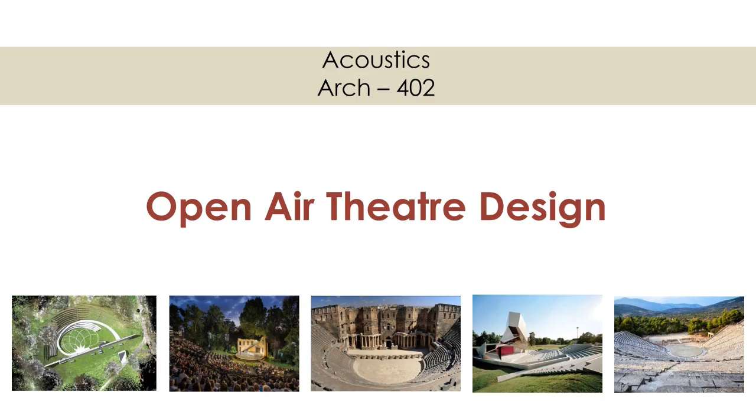Introduction. The purpose of theater is to provide recreation to people. The theater is a branch of the performing arts and it is concerned with acting out stories in front of the audience. Open-air theater is a space in which a performance may be given before an audience, and as the name suggests, it does not have any roof structure. The word is from the Greek theatron, a place of seeing.

A theater usually has a stage area where the performance itself takes place. Since ancient times, the evolving design of theaters has been determined largely by the spectator's physical requirements for seeing and hearing the performers and by the changing nature of the activity presented.

Here we have a few examples of open-air theaters from around the globe. The first one is Teatro Antico di Taormina, Taormina, Sicily, Italy. Second is Vondelpark Open Air Theatre, Amsterdam, Netherlands. Third is Regent's Park Open Air Theatre, London, England. Fourth is Greek Theatre of Syracuse, Sicily, Italy. Fifth is Toga Open Air Theatre, Toga Art Park, Toyama Prefecture, Japan. The last one is Minack Theatre, Cornwall, UK.

In order to design an open-air theatre, one must recognize how sound is affected by meteorological conditions and topography. When we talk about meteorological conditions, we are trying to see how the atmospheric conditions, like temperature, wind flow, and humidity, etc., affect sound. In spaces which are not covered, or do not come under room acoustics, we have to take care of the noise which is created at some point and is carried to another point or location where good acoustical quality is required, like an open-air theater.

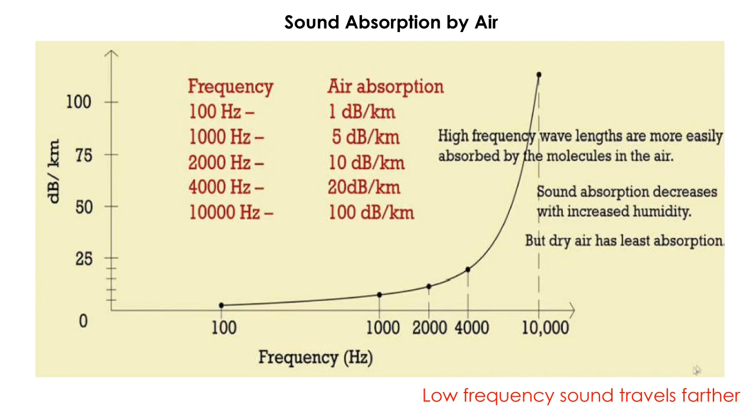So, at T equals 20 degrees Celsius, the velocity of sound is 343 meters per second. And for every 1 degree Celsius change of temperature, the change in speed is 0.6 meters per second. 0.6 meters per second per degree centigrade change of temperature is a big amount when we talk in terms of the wavelength of sound. In feet, this comes to around 2 feet per second.

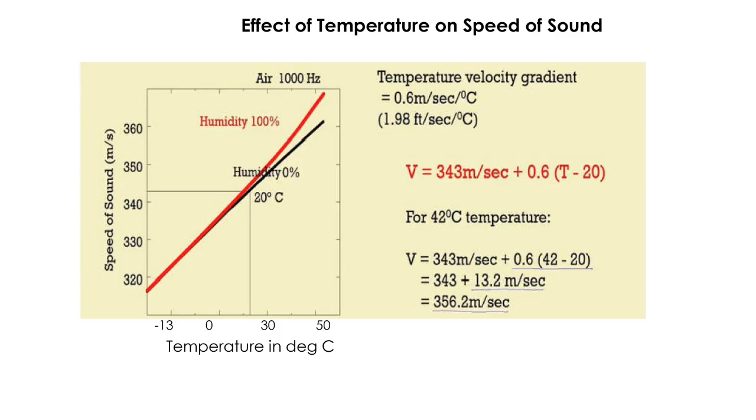When it is daytime, the ground is warm, and the atmosphere above it is cool. The sound speed at a position much above the ground will be lower, whereas the sound speed below near the ground will be higher. At the lower portion near the ground, the sound will be moving faster as compared to the upper part.

If the direction is this rightward, there will be a change or the sound wave will move upward. This will lead to a no-sound zone in this particular area rightwards of the source. If a receiver is standing here, he will not get any sound. This area becomes a sound shadow area.

Thus, even if the source is close, the people around may not be receiving the sound, whereas the sound energy is drifting upward. This is called temperature lapse or superadiabatic. So, temperature gradient leads to the bending up and down of sound waves, and during the daytime, the ground being warmer, the sound moves upwards, creating sound shadow zones in regions close to the ground.

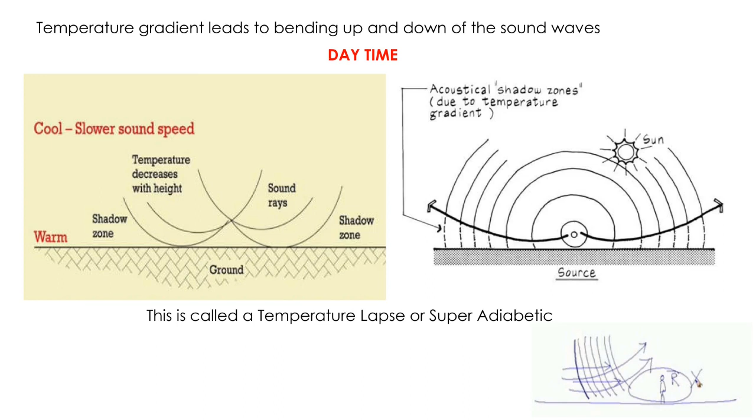The opposite phenomenon or an inversion happens during nighttime. During nighttime, the ground surface is cooler, whereas the atmosphere above is warmer, where the sound tries to move faster, leading to an inversion. You can see, here the sound is bending downwards or more towards the ground. And this is called temperature inversion.

This happens mostly during the nighttime when the temperature is the coolest right next to the ground and warmer as you increase in height above. This downward refraction of sound helps people hear conversations even across water bodies or across long distances, particularly at nighttime. Hence, distant sounds are usually heard at nighttimes rather than daytimes, particularly because of this temperature inversion.

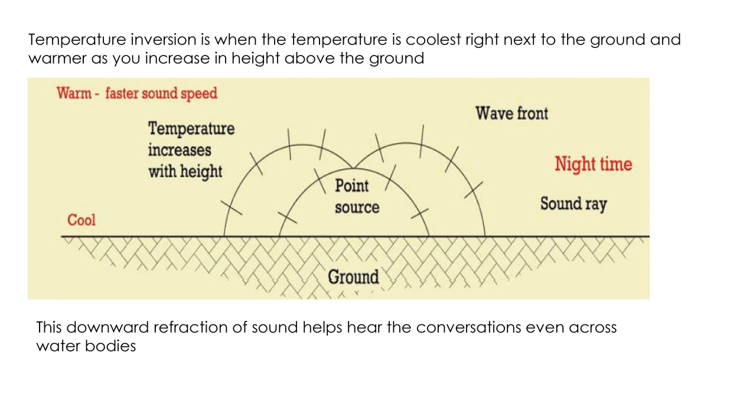This is what you see as a summary, that hot air moves faster, and when it is nighttime, it bends towards the ground, or towards the receiver from the source. And during the daytime, the hot air drifts the sound upward, which leaves the receiver with very less sound.

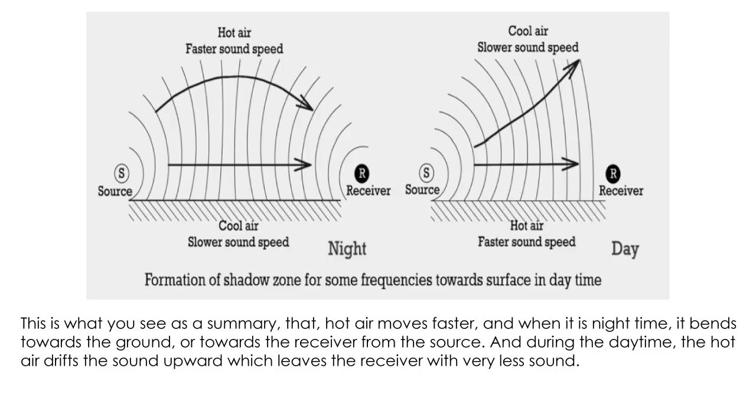Influence of wind speed on sound. The effect of wind on sound outdoors is a complex phenomenon. Downwind from the source, sound is normally bent toward the ground, increasing its sound level. Upwind, sound is bent upward, causing a shadow zone where the sound level will be reduced.

For example, at distances greater than 500 feet, as shown below, the upwind mid-frequency attenuation can be about 10 decibels for winds of 10 miles per hour. However, a reversal of wind direction can increase the sound level by about 10 decibels at the same location. Consequently, do not rely on attenuation from the wind when designing outdoor noise control measures.

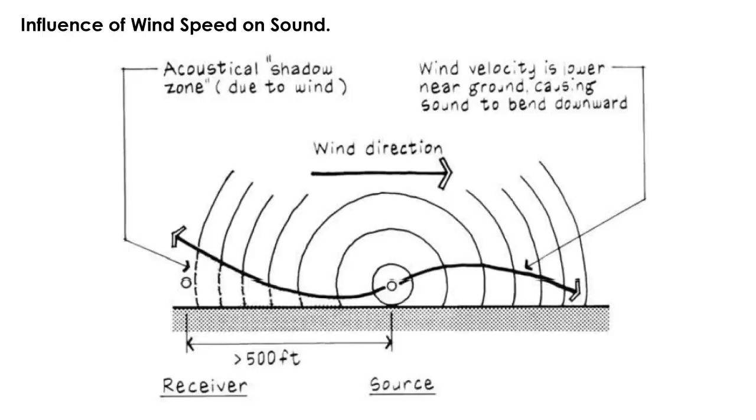When the wind is flowing, it is found that the wind speed varies logarithmically up to a certain height, say around 30 to 100 meters, depending on the speed of the wind. At the initial stage, it moves very rapidly. It is flowing, and after a certain height, it becomes steady.

It is drifted upwards by the wind when the sound wave is traveling in a direction opposite to that of the wind flow. Since the source is producing sound in all directions, a portion of the sound which is in the opposite direction to that of the wind gets drifted up. And on drifting up, some low sound pressure zones are automatically created in the opposite direction, and the sound bends down to fill up those spaces.

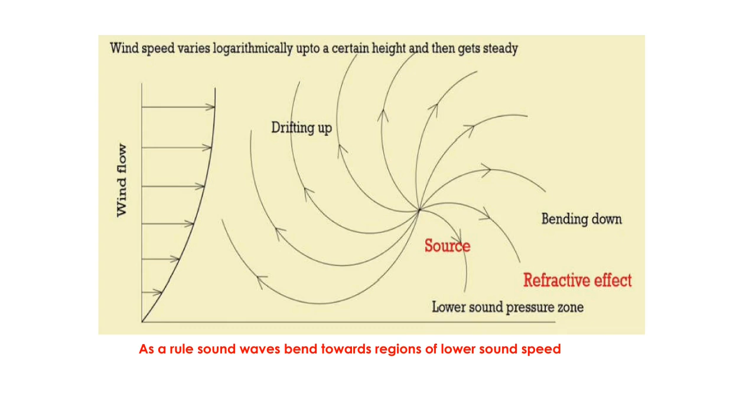So as a rule, sound waves bend towards regions of lower sound speed. We see that this drifting up and bending down causes a refractive effect of sound, particularly when the wind is present and the sound is moving steadily against the wind. Thus in the direction of the wind, wind speed gets summed up to the sound speed. But when the sound is moving opposite to the wind direction, it gets subtracted.

So, the source is at A, and the wind is blowing from left to right at a wind speed of 3 meters per second. Say the sound is produced in the direction opposite to the wind. If we consider the speed of sound, 340 meters per second, the wind speed, 3 meters per second, gets subtracted from it. Here we are considering that the wind is steadily flowing, and hence we are just subtracting the values of the speed in the particular unit. Here the unit is meters per second, so 340 minus 3 is 337 meters per second.

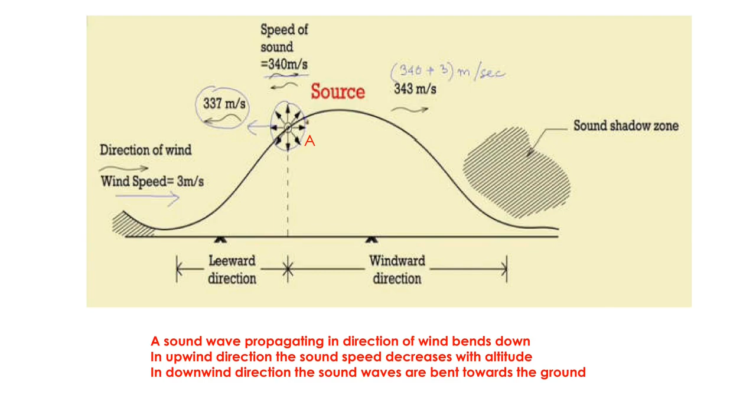On the other hand, the sound which is moving in the same direction as that of the wind, that particular sound energy will be moving faster, 340 plus 3 is 343 meters per second. When we are trying to speak or sing something in open space or open air, we have to think of the combined effect from wind, humidity, temperature changes, and air absorption.

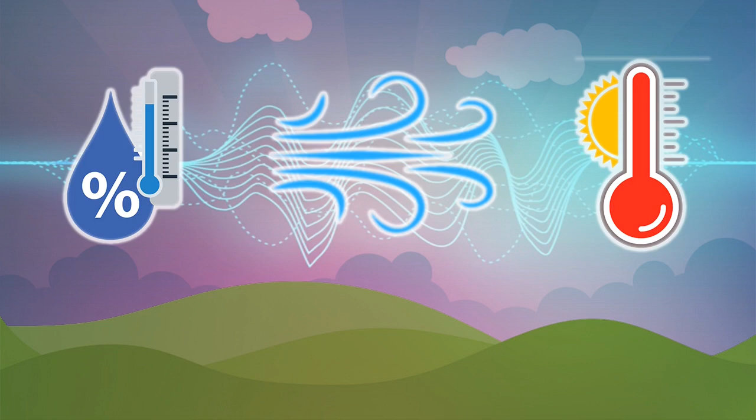We have to account for each of them in our calculations and try to look into the overall phenomena, how the speed of sound gets affected, because, with speed of sound, the distribution of it will be considered. To comprehend the influences of topographical conditions on sound, we have to examine the following two components: how sound behaves on the slopes along hills and how plantation and vegetation affects sound.

Here is a hillock or hill as shown, and a sound is produced at one end of the hill, which is not at all reaching, or a very small amount is reaching, to the house or the receiver at the other side of the hillock. If we had a house here on this left side marked P, sufficient amount of sound would have reached the receivers or the inmates in this house, but on the other slope on the right side, no one can receive the sound. It is only the diffracted sound which is reaching this particular area.

If you look back into history, the amphitheaters were usually located in regions along the hill slopes, which were opposite to the sources of sound. The noise which is created in this area, marked Y, does not travel into this area much, marked Z, and this area, Z, is considered as a quieter area. We, as architects, also need to seek our open-air theater locations in such areas where this kind of a hillock or a barrier could be artificially created or planned so that the sound source or noise from the other side of the slope does not affect our proposed location for the theater.

Unfortunately, we may not always get a hillside for our design, but a plateau situation, which the second picture shows, is very common, where the sound or noise source is at point A. Some diffracted sound, or maybe little more than the previous case, is reaching this particular area on the slope, which could be further treated by landscape elements. This house is not receiving much amount of sound as desired, which it must have received if the house had been located somewhere in this area marked X. This downhill is an appropriate location for seeking areas where we need to build our structure, which needs acoustical quality.

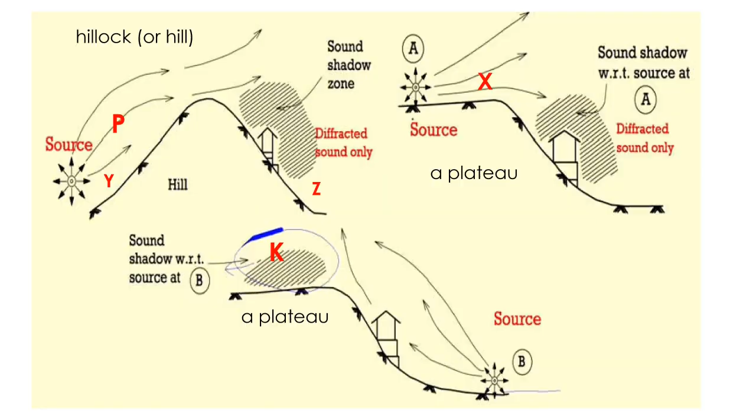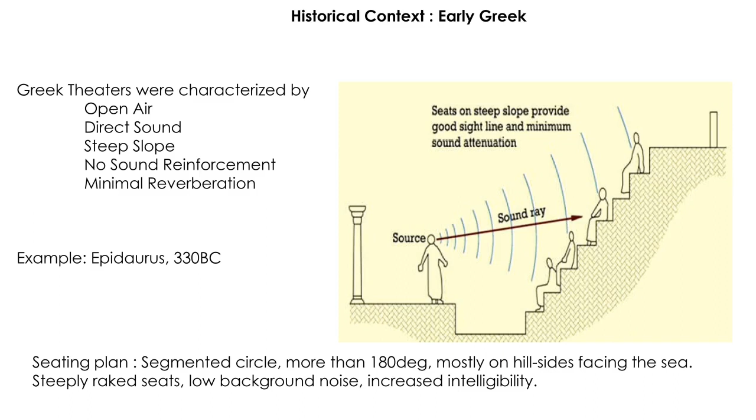Here we will see example pictures of the ancient Greek theater of Epidaurus, dated 330 BC. This is Epidaurus, which was unearthed. It had 34 rows initially, and later 21 more rows were added, and it had a radius of 60 meters (197 feet). The sound reached the farthest point, which has been explored further by researchers of Georgia Institute of Technology in 2007.

The researchers found that limestone seats filter out low-frequency sounds which were not desired, and allowed or amplified the high-frequency sounds from the stage. These limestone seats are considered corrugated surfaces, which acted as filters to emphasize certain frequencies. The designers specifically used limestone and this corrugated or folded structure to cut down low-frequency sound, due to footfalls of the crowds, etc., and to amplify the desired high-frequency sound.

The prevailing wind direction was also considered, flowing from the direction of the stage towards the audience. That also helped in getting better sound quality. The steep slope helped the sound to move to the farthest point, which was around 60 meters away.

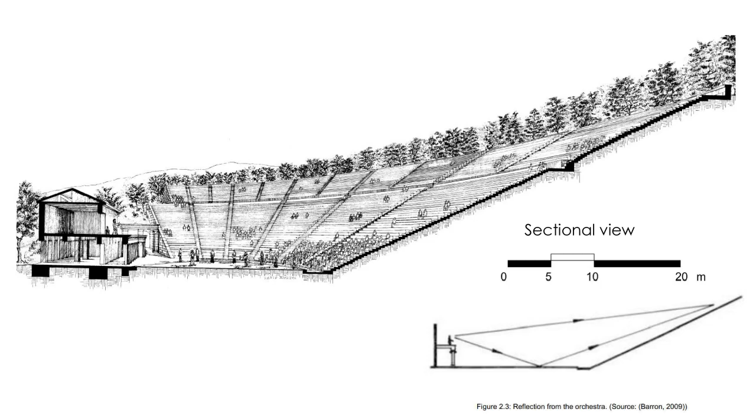The dense foliage at the back did not allow sound to reflect back; rather, sound was absorbed within the foliage. Although this is a present view, it is believed that during those times, too, such foliage existed and the trees could absorb the unwanted or delayed reflections, which would have otherwise disturbed the sound quality in this amphitheater.

The Romans also followed the seating arc limited to 180 degrees, and used arch features instead of hill slopes. They had a high guard wall which prevented the sound or noise outside from entering the amphitheater area.

This was adopted by the Greeks along the hill slope. The Romans created an arched facade to cover or enclose the sound or noise that could disturb the performance, that is, the desired sound from the performers. Romans had a high wall at the back to cut down the noise from outside. They added the stagehouse, and the raised seating area in front of the stage, and had huge awnings to shade the patrons, and these helped in early reflections of sound.

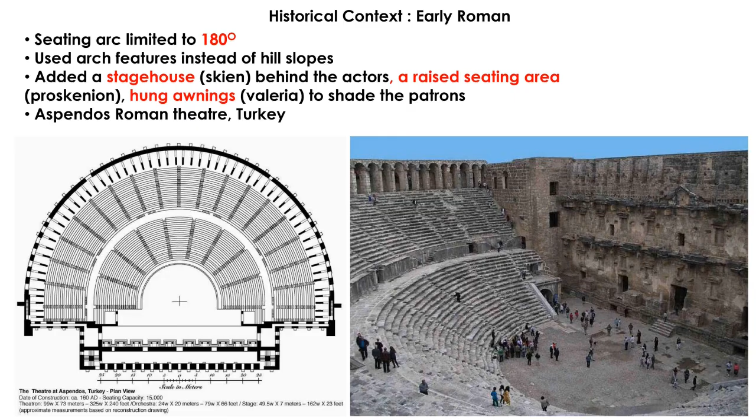Roman theaters, like the Colosseum, or the Aspendos, have these features. The colonnades at the back helped in cutting down the noise. At the front, on the stage area, there was a high wall, which also helped to cut down sound, and the seating area is similarly planned like the Greeks. All these helped in getting a better acoustical quality for these spaces, but these were done several centuries back.

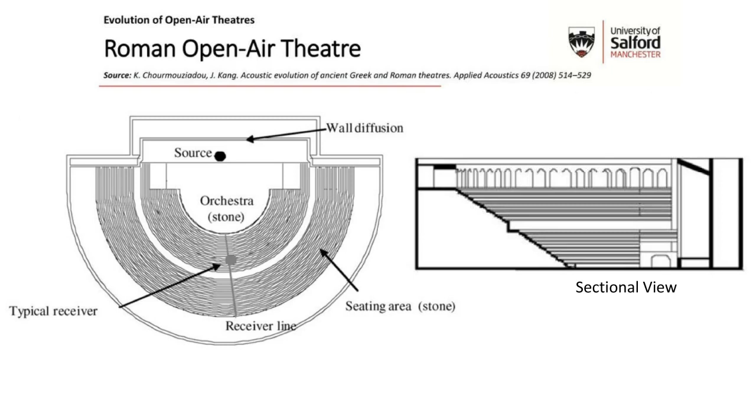The understanding which we have formed from the meteorological conditions and the topographical conditions were adopted. We can conclude that minimization of external noise is required, and that could be achieved by selecting sites along hill slopes or at an elevated level, or by shielding the site with barriers or walls which could check the external noise. Sufficient directly propagated sound has to be encouraged since there are neither much reflections nor diffusion, diffraction, or anything playing a role here in propagating the sound.

And it is the direct sound which needs to reach, and for that, we can take into account the wind direction. The orientation is crucial, which should account for the wind direction. To utilize sound from the first reflections, we can plan a canopy over the stage, as the Romans did. Thus, when we look into the open-air designs, we must keep in mind that first reflections can be utilized by providing some sort of a canopy over the stage so that the performers can receive back their own sounds as feedback, and also to spread the sound more towards the audience.

Moreover, the steps along the hill slopes also helped in sound reflection, as seen in the limestone steps of the Epidaurus. Materials like limestone can be used in corrugated fashion so that they can help in first reflections. Control of late reflections and elimination of echoes by having proper plantations at the back can help in checking late reflections. You can also propose or build a wall at the back to allow the sound to move towards the trees and vegetation, and it can check the external noise.

Alignment for acoustical advantages, such as orientation towards the wind direction considering the noise source location, are also to be taken into account when we think of planning for an open-air theater. We have analyzed the climatic conditions, topography and landscape. Then we have learned how the ancient Greeks and Romans have created many marvelous theaters. Now we shall discuss the open-air theater design principles of modern days.

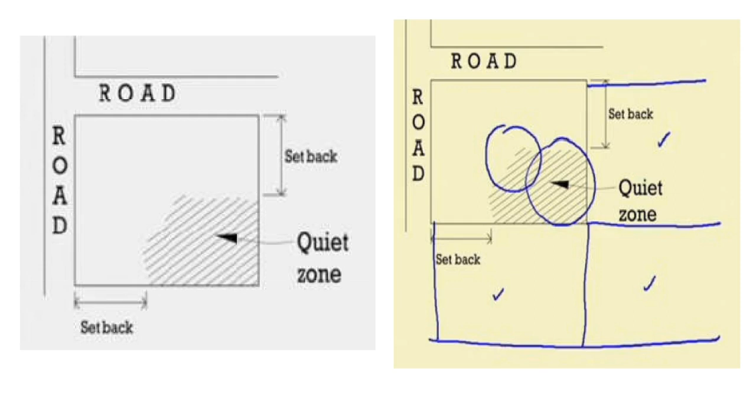Firstly, we need to understand where the site is located and the adjacent conditions. That may probably have some influence or can add to the prevailing external noise for that particular site. In that case, we may consider the central part of the site as being sufficiently distant as far as noise sources from outside are concerned. This decision has to be taken first before we start designing our open-air theater.

Now assume we have the adjoining road and other parameters, and it is quiet on the adjacent plots, then we can plan to cut down the noise from the road by considering making a row of buildings that would remain functionally unaffected when placed along the noisy road. These buildings act as a reflector to the sound which is created in the road and do not allow the sound to enter into the open-air theater zone.

Furthermore, there is an addition of a backstage, a wall behind the stage, which can also prevent the sound or external noise from entering into this particular area. Thus, providing a noise-free zone within the site by creating a line of buildings or a back wall behind the stage or both to protect the OAT from the external noise.

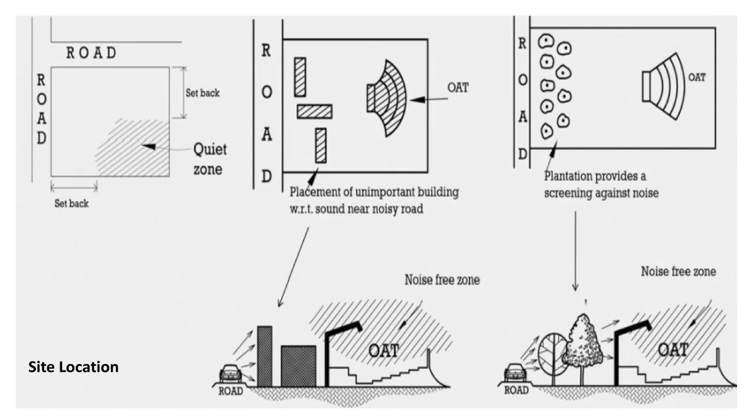Similarly, by planting a few rows of trees of different sizes of foliages as discussed previously, we can get a reduction in noise level. By maintaining shrubbery heights of up to 10 to 12 meters, we can prevent the incoming noise and allow the OAT to be a noise-free zone. For the main theater, usually, with capacities of up to 600, we do not require any amplification of the sound and can carry on with the performer's own voice.

Coming to the orientation, the time of the performance is very much important, along with it, the study of the sun path is also crucial. The concepts of awnings and shadings, which the Romans had utilized around 2000 years ago, could be adopted. In case the performances are scheduled during daytime, it is imperative that the audience must not be facing the sun.

Suppose we have some religious or youth gatherings, where there is no open-air theater, but just an open field where the ground level is flat all along. We have to address the effect of temperature. Recall that the temperature on the ground surface is higher, and that helps bend the sound on the upper side, creating sound shadow areas at the back. It may happen that the audience members seated at the back side are not getting any sound. This occurs not because the actor on the stage is speaking with a low unamplified voice, but because of the effect of temperature.

We must also consider preventing late reflections, because those are the causes of echoes. We must avoid buildings at the backdrops, that is, at the back of the audience. There should not exist any hard surfaces like tall buildings at the end, which will, otherwise, reflect the sound and generate unwanted echoes.

Historically, the Greek theaters were characterized by open air, with direct sound moving to the top, up to 60 meters. They had steep slopes of 2:1 gradient. There was no sound reinforcement during those times, and reverberation was very minimal in that kind of structures. The same features are adopted for our open-air theaters too.

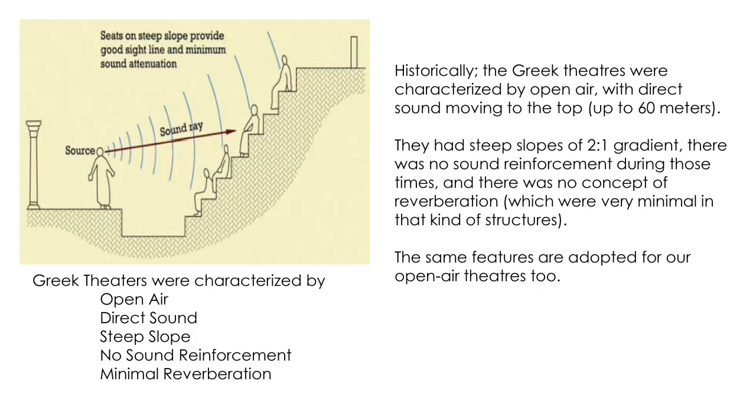Greek theaters were characterized by the following points. 1. Open air. 2. Direct sound. 3. Steep slope. 4. No sound reinforcement. 5. Minimal reverberation. The Greeks and Romans also accounted for the wind direction, which we had seen that if the speech is along the wind direction, it helps the sound to reach the farthest audience. Accounting the wind direction for acoustical advantage has to be kept in mind.

Sufficient directly propagated sound has to reach the audience, and we do not consider a very steep slope. However, this particular slope should be at least 12 degrees. A hard surface at the back of the stage can help reflected sound to move towards the audience. If the source is on stage, then reflected sound from that area can move towards the audience, with help from the wall at the back of the stage.

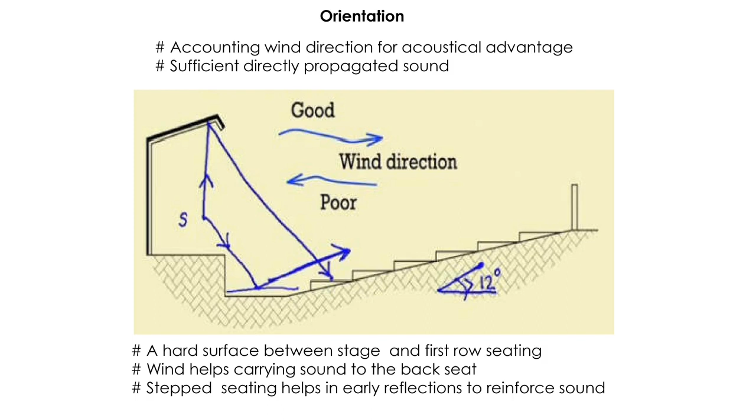Some amount of sound also can move towards the floor, because in an open-air theater, there are very less chances of getting early reflections or helpful reflections to reinforce the source sound. We have already seen that the limestone steps at Epidaurus, which had corrugated or folded surfaces, helped in multiple reflections of the sound. The same concept can be adopted in our design.

Stepped seating allows sound reflection from the proscenium side, or the stage side. To get sufficient directly propagated sound, we need compact planning. The sound from the first reflections is always welcome. Only the direct sound will not be sufficient to reach the last row of seats. We need the first reflections also, such that they can create better sound quality within the space.

Sound bounces back and forth from the vertical risers and the stage wall. Hence, we can take advantage of these as creating first reflections. These help in creating a blended sound within the open-air theater. The major problem here is that we are in the open air, we cannot follow the principles of room acoustics, hence concepts of reflection from the ceiling or the side walls are no more prevalent.

While trying to take advantage of whatever reflecting areas exist to enable first reflections for better hearing or better blending of the sound, delayed reflections may happen from the back wall, so if we plan for a back wall at the end of the OAT, then we have to check the delayed reflections or the echoes. If the back wall is present, it should be limited to a particular height.

Scattered energy is required to fill in the gaps between the few first reflections happening. And these scattered energies from the reflected sounds coming from the treads and the risers in the audience seating area can be utilized. The gaps, where there are no audiences, help in accumulating this scattered energy for better hearing or better quality of sound. Diffraction and scattering from seating areas help to achieve a smooth decay curve.

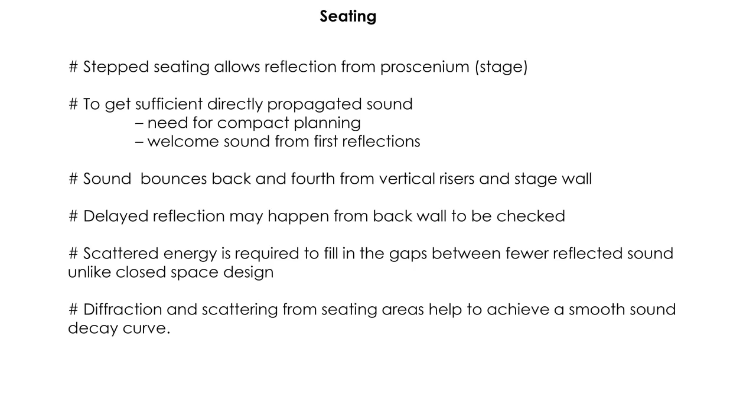Here, we see how the sound is moving. The direct lines are shown in pink, and the reflected sound is shown in blue. By taking advantage of the back wall and the risers of seats, some amount of early reflections occur, to reinforce the source sound. Additionally, these corrugated seats help to get blended sound of better quality.

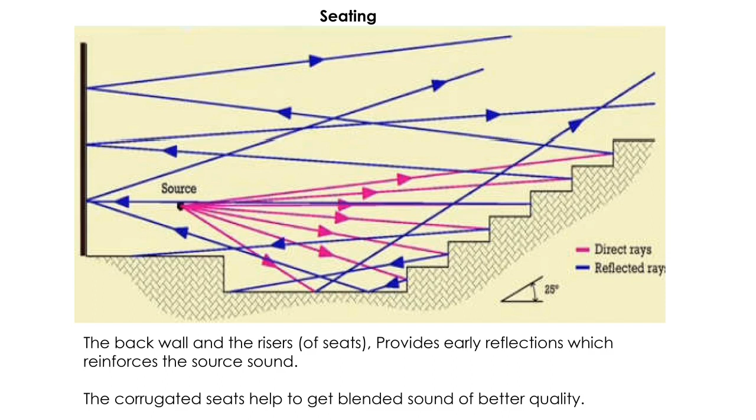However, if we have a flat slope, these multiple reflections do not happen; it is like an inverted cone situation. In this case, whatever sound strikes the sloped surface gets reflected up towards the open sky. So, if we think of a flat slope, then you would be ending up with bad quality of sound. The inverted cone effect directs the sound upwards, causing loss of energy, and fewer early or first reflections occur, and thus creates an undesired design.

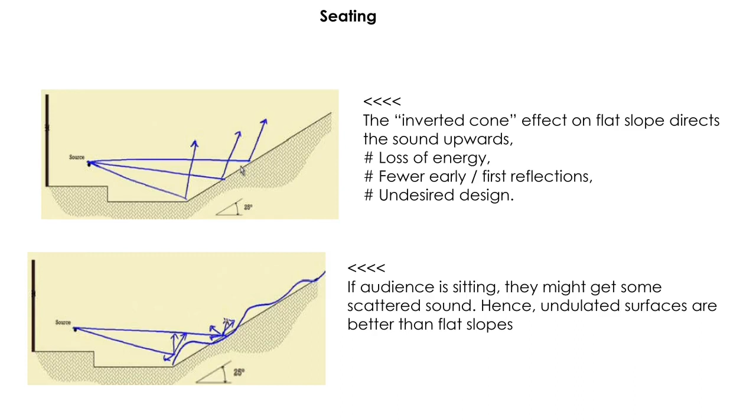But if you plan a mound for the audience area, keeping it very green, the undulations there will help in scattering sound towards the audience. Some pointers to remember regarding the seating area. Sound reflection from the tiers of benches, if at a distance, produces a sustained echo. Pitch can be determined by the distance separating the risers. This causes distortion in some frequencies and affects sound quality.

In OAT, the frequency-dependent reflections generally can pass overhead, but they can converge to the stage, disturbing the performers. Provision for covering stage, performer audibility and directing sound. Moreover, the sound reflected from the tiers of benches, if at a distance, can produce sustained echoes. So, these early reflections are required to happen in the front part of the open-air theater only.

We can even determine the pitch of those particular frequencies that will be echoed. This distorts some particular frequencies and may affect sound quality. The echelon effect of auditorium design can happen for this particular kind of corrugated seating too.

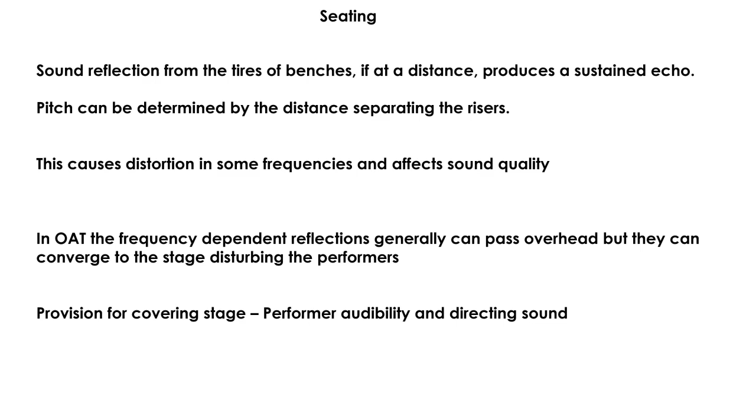In OAT, the frequency-dependent reflections, generally, can pass overhead but can converge to the stage, disturbing the performers. Since the seats are circular, they can create a concave effect and can focus sound back to the stage, and the performers can feel this disturbing sound coming from the audience side. It could be helpful if the performer's side has a covering over the stage to cut down the late reflections, which are coming back from the concave surfaces of the seating area.

Let's say this is the stage area, and these are the concentric seating. The sound may get reflected back towards the stage area from the back row seats. This can create an echo condition, that is, the source can get back the sound at a later time, as a late reflection from the backseat curvature. As you are gradually moving towards the back, your height is gaining.

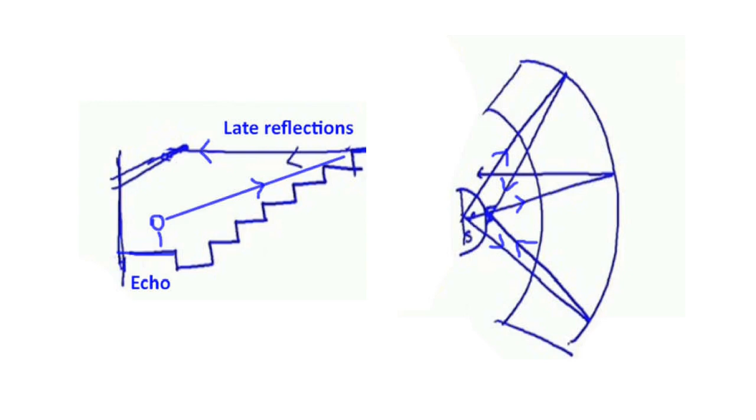Hence, an awning or support over the stage can cut down the reflected sound coming towards the stage at a certain height. Thus you can cut down the late reflections happening from the last row of the seating. This convergence of sound towards the stage can be cut down by the help of this awning or the support over the stage. Their dimensions must be calculated as specific to site.

Let us now see the conditions for stopping echoes coming towards the audience. A back wall can be created, but if the source sound is hitting directly to the features at the back, maybe a building, a tree, or a line of foliage, they can partially echo it back towards the audience. The building, if made of brick or concrete, will absorb a very small amount of this sound, and the major part of the sound energy will be reflected back, in the form of an echo.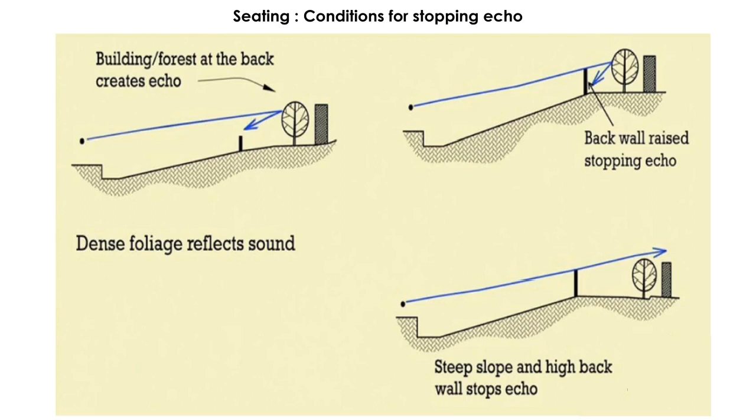In case of trees, it will absorb a portion and will reflect back the remaining portion, depending on the density of foliage over there. The back wall has been raised, and that stops the reflection or return sound. Thus, creating a guard wall at the rear end is very important and has to be built accordingly. If the back wall is too high, it will completely stop echoes. In this case, the sound that is coming from the source will completely move out from the seating zone, which is also not very desirable.

It is important to increase the lateral reflections for an open-air theater because on the top we are not allowed to provide any cover. There is no concept of ceiling for an open-air theater. In the figure, a side wall is planned. These side walls can also help in reflecting sound towards the audience, which can be considered as lateral reflections. Nowadays, these side walls are made such that the sound is pushed more towards the audience side. A percentage of the sound energy moves back towards the audience, helping in early reflections or better blending of sound.

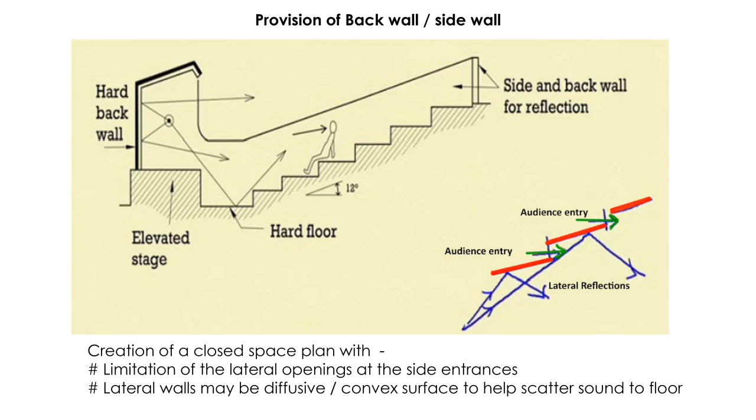Hence, this creates a closed space plan. Also, provide door openings in these side walls for people to enter the OAT. Minimal entry through these walls, or an indirect entry plan, is a good choice. The entry should be located in such a manner that it does not cut down the lateral reflections in the process. You can also plan for convex or corrugated surfaces along the lateral wall.

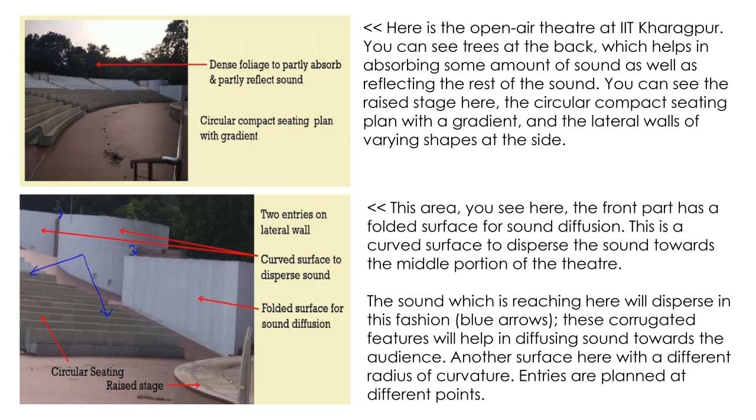This is a curved surface to disperse the sound towards the middle portion of the theater. The sound which is reaching here will disperse in this fashion, blue arrows. These corrugated features will help in diffusing sound towards the audience. Another surface here with a different radius of curvature. Entries are planned at different points.

We have a case study of Ansal Plaza at HUDCO Place, New Delhi. Let us take a look. A part of HUDCO Place built on 35 acres of land, Ansal Plaza is a shopping complex situated near South Extension. A perfect hangout destination, it is built in a circular fashion around an amphitheater with a center stage. Different cultural functions are organized here from time to time, such as fashion shows, live band performances and performing arts to promote the retail area. The circular entity of the building has a special significance.

It reflects the individuality of a shopping mall, indicating to the customer that each and every part of the building has something of quality to offer. Leading off from the Blue Bowl and circular Minar, here the central axis path at the stepped level, interacting spaces and communicative linkage with nature generate a soothing effect.

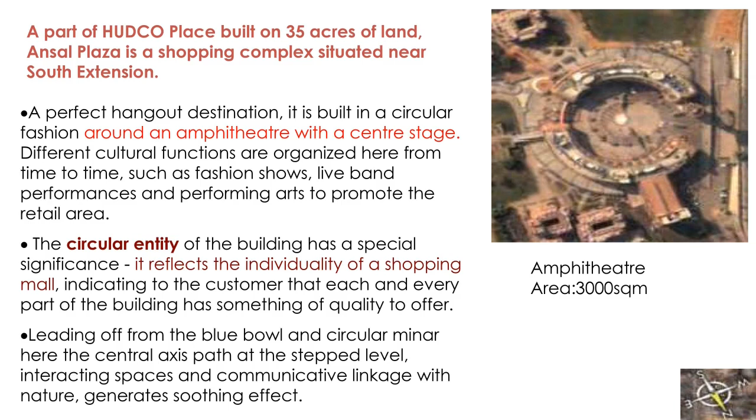The area of the amphitheater here is about 3,000 square meters. The semicircular design clearly indicates a fundamental understanding of the spherical propagation of sound, and a desire that every member of an audience should hear equally well what is being intoned on stage. The acoustic advantages of a stepped dish are only optimized, however, when the speaker is standing at the exact center stage. Only then will the voice propagate symmetrically, and reflect back from unoccupied areas to the same point.

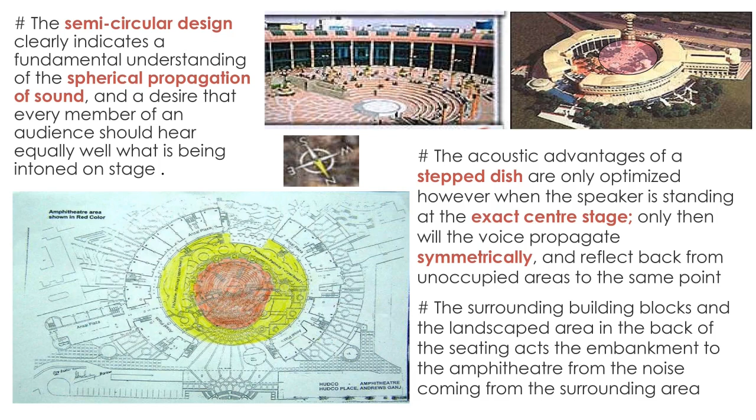The surrounding building blocks and the landscaped area in the back of the seating act as the embankment to the amphitheater from the noise coming from the surrounding area. As such, no backstage is provided. The sound appears to spread out when no audience is sitting, and no extra measures have been taken to enhance the sound propagation. The small green areas are provided around the amphitheater, which act as absorbers along the colonnades.

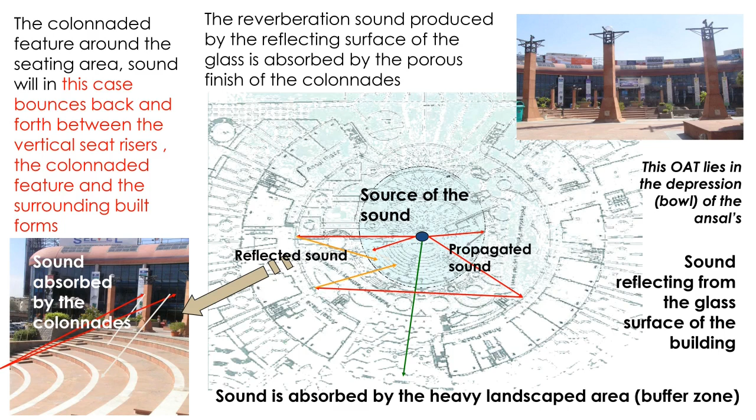With the colonnaded feature around the seating area, sound will in this case bounce back and forth between the vertical seat risers, the colonnaded feature and the surrounding built forms. The reverberation sound produced by the reflecting surface of the glass is absorbed by the porous finish of the colonnades. Sound is absorbed by the heavy landscaped area, which acts as a buffer zone.

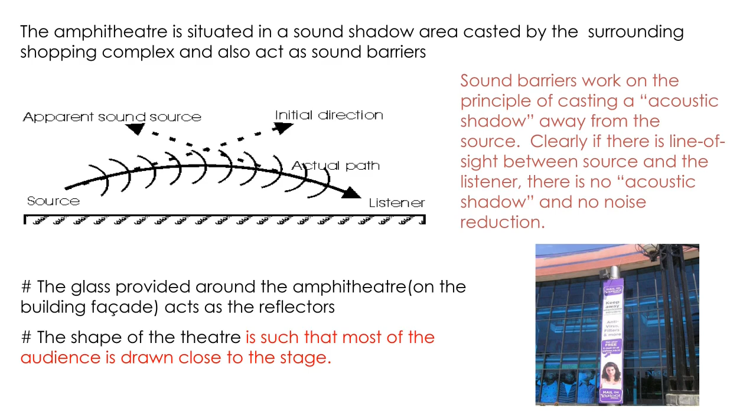The amphitheater is situated in a sound shadow area cast by the surrounding shopping complex, which also acts as sound barriers. Sound barriers work on the principle of casting an acoustic shadow away from the source. Clearly, if there is line of sight between source and the listener, there is no acoustic shadow and no noise reduction. The glass provided around the amphitheater on the building facade acts as the reflectors. The shape of the theater is such that most of the audience is drawn close to the stage.

The colonnades surrounding the amphitheater are used for three purposes. A. Sound absorbers and reflectors due to surface finish material, porous red sandstone. B. Placing of speakers and lights. C. Decoration at the time of events. The slope of the floor is towards the stage, and it is nearly about 12 to 15 degrees to the horizontal, which feels almost flat.

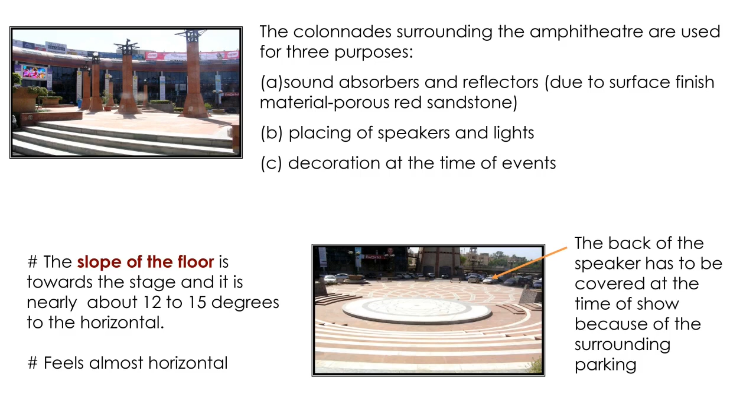The back of the speaker has to be covered at the time of show because of the surrounding parking. Speakers are used for various performances. We can see the placements of the speakers in the picture. Planters at the back act as absorbers. Varying heights of planters break the path of sound as required.

Open-air stadiums require cutting down on reverberations that can interfere with announcements and other speech. In stadiums, designers often use fiberglass and other porous materials to absorb sound. The roof should direct sound to the field. Crowd noise in stadiums during moments of high excitement in games is typically between 95 to 105 decibels and even 110 decibels. Steeper grandstands make more noise since the fans are all closer to the playing field.

A roof or dome holds noise in and directs it towards the field. A giant open-air bowl configuration dissipates noise. Design thumb rules for an open-air stadium. Nowadays these are covered with fiberglass, ETFE, which is ethylene tetrafluoroethylene, or PTFE, which is polytetrafluoroethylene sheets. And when the crowds cheer or applaud the sportspersons or players, it creates a sound of around 90 to 95 decibels, which may go up to 105 decibels, and occasionally even 110 decibels. Those sounds are all directed towards the field.

It's better to have a curvature or a covering which will direct the sound towards the field, then it is fine. Otherwise, this amount of noise will not allow other spectators to listen to the announcements being delivered or on-field discussions made during the game. The ongoing sports performance is intended to be watched by the spectators, rather than being shouted at, but such noise that is produced by the crowd reaches the field.